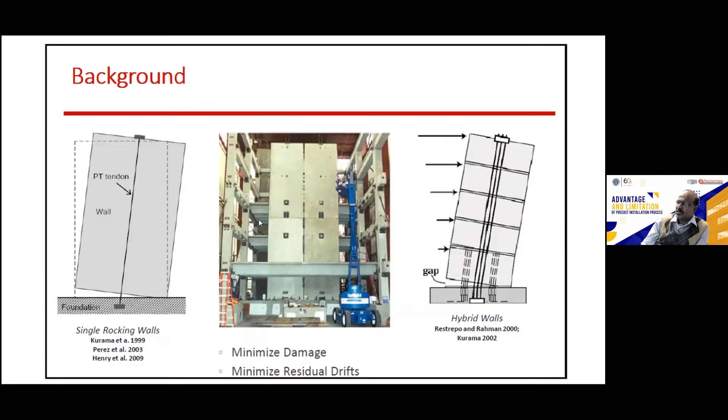And by doing analysis, by doing the proper evaluation, we confirm that the PreWEC is going to be far superior to any of these wall systems that have been studied. So for the remainder of the presentation, I'm going to focus on two systems.

One is the single rocking wall, and the second is the PreWEC system. The reason we studied the single rocking wall is to understand the dynamic characteristic of a single rocking wall and quantify the amount of damping that one can attribute to a rocking behavior associated with this wall. We were aware of the fact that if I quantify the damping to be about, let's say, 5% equivalent due to rocking, that 5% will not be expected in the PreWEC system. The moment you introduce hysteretic damping, the velocity of the structure is going to be changed during rocking, and therefore the amount of damping that you can experience will be different as well.

But we wanted to quantify the amount of damping coming from this system, amount of damping coming from this system, compare and contrast, and figure out what would be the advantage. We were aware that if you have a moderate seismic zone, maybe the single rocking wall would be cheaper and easier and would provide adequate performance. That was our mindset when we got into this particular quantification.

So when we do a PreWEC system, I do have videos, and I will share with you at the end of the first part of the presentation. So when you look at a PreWEC system, this particular test was completed at Auckland. Basically, what you will see is that the amount of damage to the wall will be pretty limited. All of the deformation will take place here in the O connector, you can see here, and they are the ones that dissipate energy.

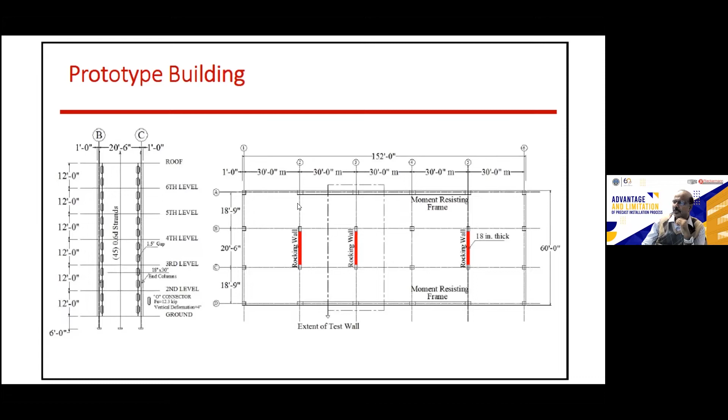From that particular prototype wall, which gave us the dimension, the amount of post-tensioning, and the seismic mass associated with that structure, we came up with a very simple structure here - a full scale with mass lumped at 6 locations at the floor level, from which we then reduced it to an equivalent system, which is a concentrated mass at one location. From here, we then scaled down to a 1 to 3.6 scale ratio, about the 3rd scale, to come up with a structural system that we can put on the shake table.

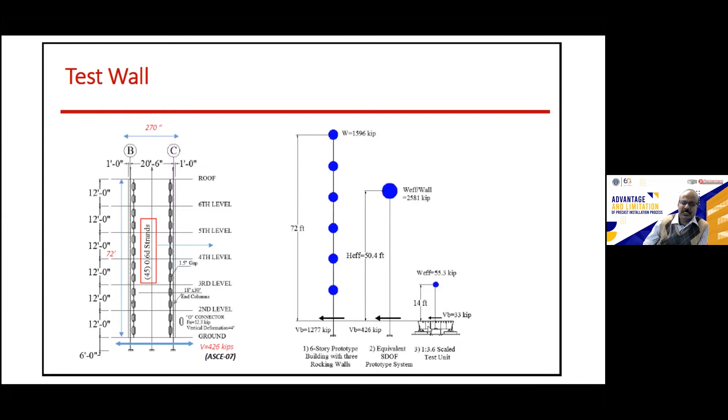In all cases, we ran through a series of tests and made sure that our system, the newly designed wedges, will sustain large inelastic strain. So we would pull on it, and we defined two things. The first one is fracture strength—when the first wire breaks, we call it the fracture strength.

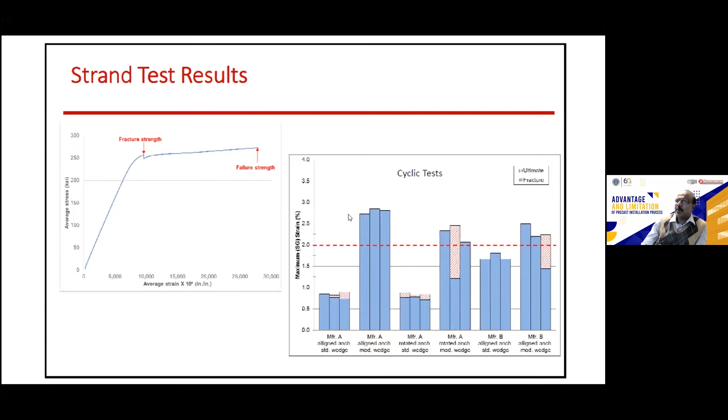Then for the first part I'm going to cover, the single rocking wall. We designed four different wall systems, each with different amounts of pre-stressing. We varied the initial pre-stressing, the seismic height, the seismic shear resistance, and we also looked at the confinement issue at the base of the wall.

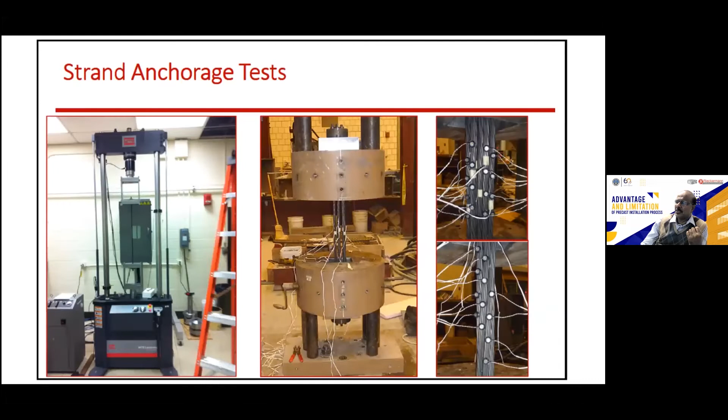The reason we looked at that is, at the base of the wall, because it rocks, you could potentially crush the cover concrete, which isn't a big issue since you can always fix it. But what we discovered was that it can potentially penetrate into the core concrete as well. So we wanted to see how to overcome this particular challenge.

In past tests, we used a steel channel at the base of the wall so that there wouldn't be any crushing and spalling. That solved the problem in terms of dealing with the crushing and spalling of concrete in the toe region.

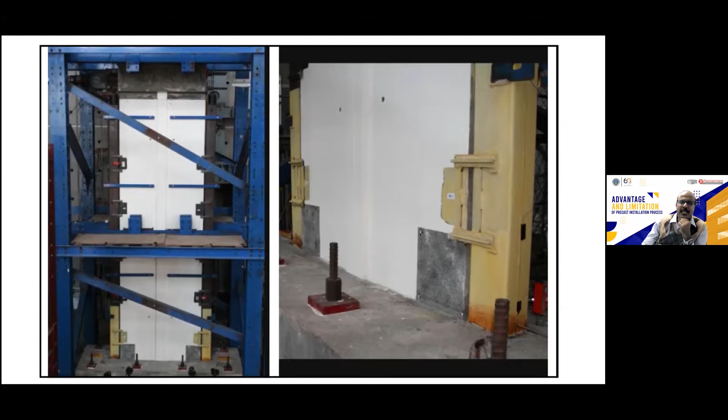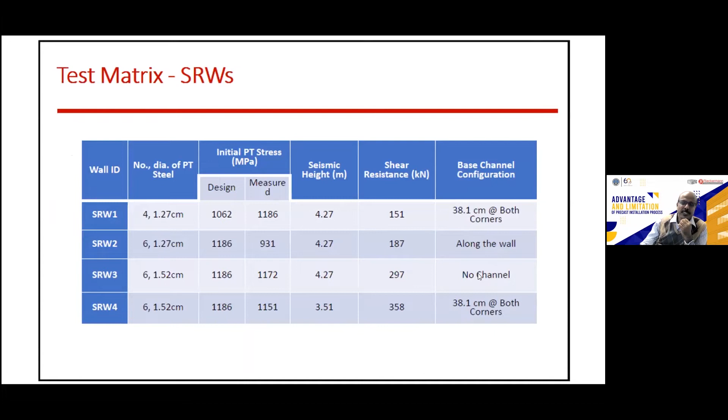However, the precasters we work with were not happy that we were using steel channels because of the added cost, and they questioned whether, if it's limited damage, they'd rather fix it after an earthquake than install steel channels up front. So we made that one of the variables—in some cases we included a channel, in others we did not, to address their concern.

What's interesting with these structural walls designed to rock is that, if you've done seismic design with cast-in-place walls, you'd have confined regions at the ends of the wall where forces concentrate. But in between, typical design dictates only a minimum amount of reinforcement to control shrinkage cracks. So the amount of steel we ended up using in the walls was very limited.

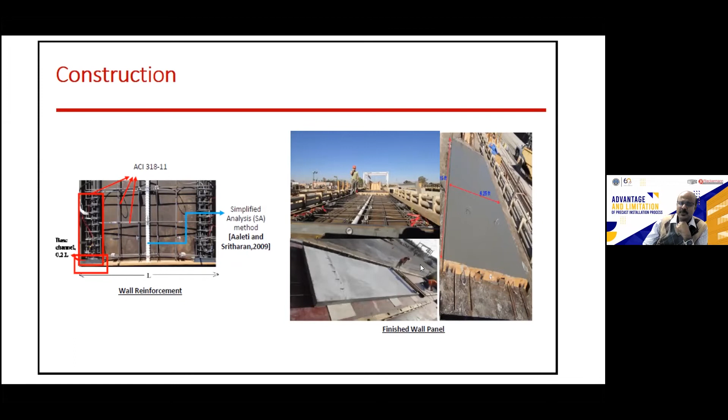Here's another shot showing the construction of the wall panel—you can again see how lightly reinforced the walls are, except at the ends where we provided confinement reinforcement. The wall panels were cast at a precast plant and then transferred to the test site.

The test was done at the University of Nevada, Reno NEES testing facility, if you're familiar with it. We put the structure on the shake table, supported by the foundation, which was used so we could anchor the post-tensioning in the middle. There's a pocket here—hopefully you can see the mouse—and inside is where the post-tensioning anchorage was placed. The wall foundation was secured rigidly to the shake table so it experienced the same excitation.

Remember I talked about the effective height and effective mass for the shake table test—those were calculated. What you're seeing here is that the actual mass was placed outside the shake table, and it was transferred using a rigid link beam to the wall at the right location, so that the seismic inertia effects were transferred to the rocking wall, allowing it to experience the earthquake effects.

For shake table tests, for each of the tests, we used in the order of about 15 to 18 different seismic motions. We used 2 suites of motions.

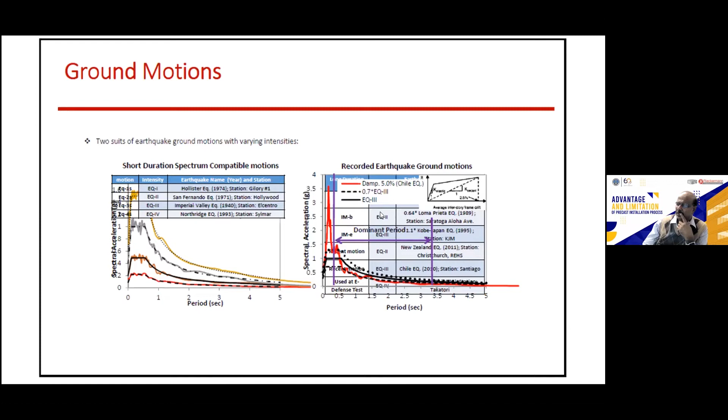We also took some recorded earthquake motions, so those came from New Zealand, Chile, US, and Japan, and a number of other countries, and then we modified them slightly, but made sure it was the actual motion with an amplification or de-amplification. The reason we did that was that the spectrum compatible motion provides some useful information, whereas the recorded ground motion provides some other useful information. So we kind of mixed and matched.

What I wanted to do is show you some shake table tests, so you get a feel for how they perform in the actual test. But before I do that, let me show you some damage up front, and then I'll go to the video file so you can see it.

If you look at the test observations, EQ3 is the design level earthquake - basically an earthquake that's equivalent to a design spectrum that you have used to design the wall. And almost in all cases, as you can see here, there wasn't much damage that occurred to the wall panel. So the walls rocked on the foundations and then came back to their original position.

When you look at the maximum considered earthquake, you can see there was some damage, and it's often confined to the cover concrete and required some superficial repair. But I must say that in some cases, there was some penetration of the damage to the core concrete as well.

Even though in this particular case we did use a base channel, and in this case the wall panel did not use a base channel. I just wanted to give you a feel for how they appeared with and without the base channel, and the extent of damage you would experience in a maximum considered earthquake.

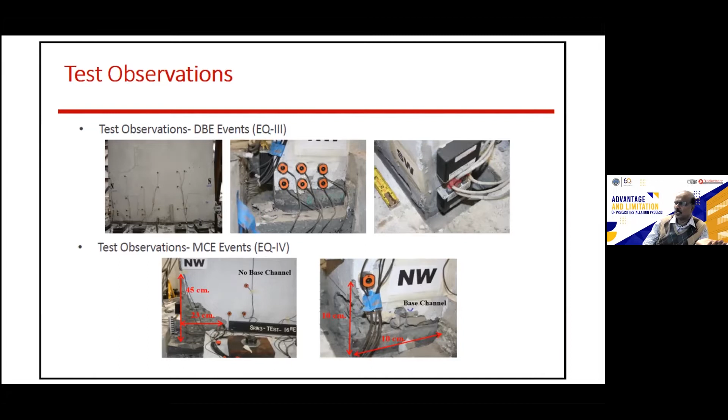So the maximum considered earthquake would come from a magnitude 7, magnitude 8 type event. It happens once in the lifetime of the structure is what you're expecting, but nonetheless, that's what you're expecting the structure to do.

And as I mentioned, we did vary a number of things during the design - these are different wall panels with different strength and different amounts of post-tensioning. And because you don't have any energy dissipation into the system, you could say that most of this behavior was nonlinear elastic characterization, which is what you see here.

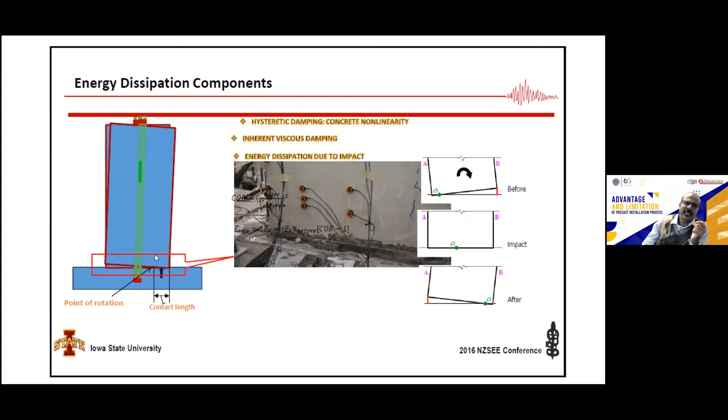When you have a single rocking wall, the energy dissipation is primarily coming in different forms. The primary component is basically due to impact. There's inherent viscous damping one could expect, but since there are no non-structural elements or any large structural system surrounding the wall, that inherent viscous damping is going to be small. We did observe some nonlinear hysteretic damping creeping in due to concrete experiencing nonlinearity, and as you can imagine, that happens in the toe regions of the walls. It's very small, and that component was also expected to be small.

What we wanted to do is quantify some of this damping so that we can estimate the amount of damping these walls would experience.

There are a number of sensors used on the wall structure. They help us quantify the amount of damping these systems are experiencing.

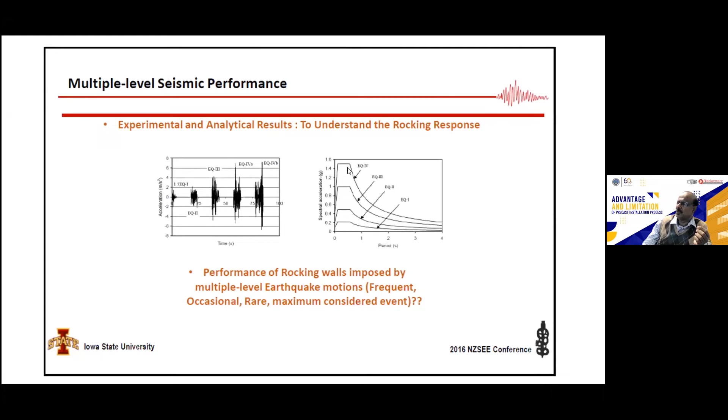For example, if I were to look at the different levels of earthquakes—these are the spectra I'm showing for EQ1 all the way to EQ4—we established, based on a number of criteria, which I can go into detail on if you're interested, at a given earthquake level, how much drift we're going to allow.

How much acceleration are we going to permit, and what would be a tolerable residual drift we would accept when a structural wall is subjected to these different levels of earthquake intensity motions. In other words, if we subject the wall to EQ3, and the maximum drift is below 2%, if the maximum acceleration the wall experiences is below 1.2 G at full scale, and if the wall comes back to less than 0.5% residual drift, we would claim that wall has performed satisfactorily.

If it violates any of these, then we will quantify that to be unsatisfactory, at least in that particular category.

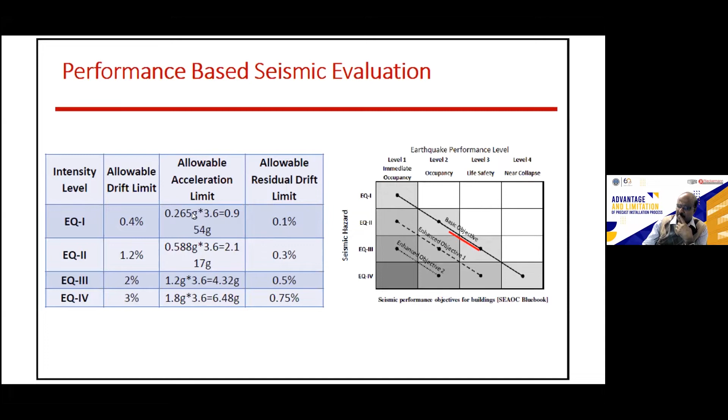The concept for this was developed using what originally started from the SEAOC Blue Book as the performance objective for different seismic hazard and acceptable performance for different levels of occupancy. That's how we developed the criteria. I don't want to go into the details as to how that came about. Some of these numbers were given by SEAOC, so we used that as guidance, and we did include some of our own analyses to help us establish these performance criteria, which were established upfront before we did the test.

So let me just recap. I ran a series of single rocking walls. They had a limited amount of damping, on the order of 5 to 7%, which one would argue is a very small amount. If you go to a designer working in a seismic region, I think some of you are probably in that category, and if I ask you, can you actually run with 7% damping in a structural wall, I think most people will say no.

So how was that possible? Especially given that the general belief is that you need more damping in the system. One of the things we proved in this study, and some of the other subsequent studies, is that the amount of damping you need in the system is not as important or significant as people once believed. So you don't necessarily have to have 25% damping. Maybe you need 10% or 12% damping. But what this study tells you is that you don't need an excessive amount of damping for the structures to survive.

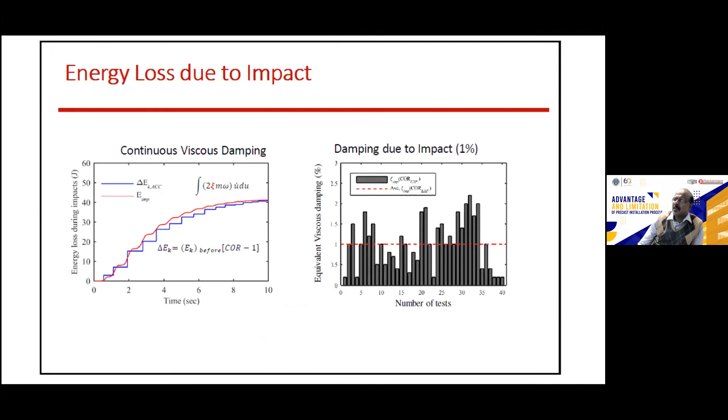So one of the messages I want to leave with you based on this presentation is that one of the most important components for seismic design is the ability to design the wall to experience a nonlinear response. By doing the nonlinear response, as you can see here, I'm limiting the amount of force that goes into the system. So that component, the fact that the wall can experience elastic nonlinearity, is more important than the amount of damping.

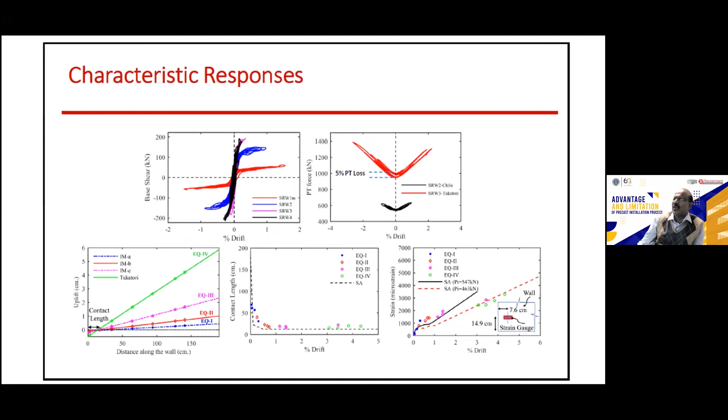If I were to rephrase that, in the old days people said don't design them to behave elastically, because that's not good, since they will attract more seismic force. I completely agree with that. But that doesn't mean you have to design it as a nonlinearly responding structure plus throw in 20-30% damping. Instead, what I'd argue is that all you need is a structure with the ability to control the maximum force that goes into it, or the maximum force that's going to be attracted, so that you can control the design. And you need some damping in the range of 10-15%, not 20 or 30%. That's something useful to keep in mind.

One of the lessons that we got from going through this particular structural system.

Even though we did not expect these walls to survive the actual earthquake, since they performed better, we developed a design approach for how you should design these walls. They could easily be designed for moderate seismic regions, for example. We recommended the amount of damping to use in design and established a design procedure so that it's a cheaper way to design rocking seismic walls without adding a lot of supplemental damping if you don't have to.

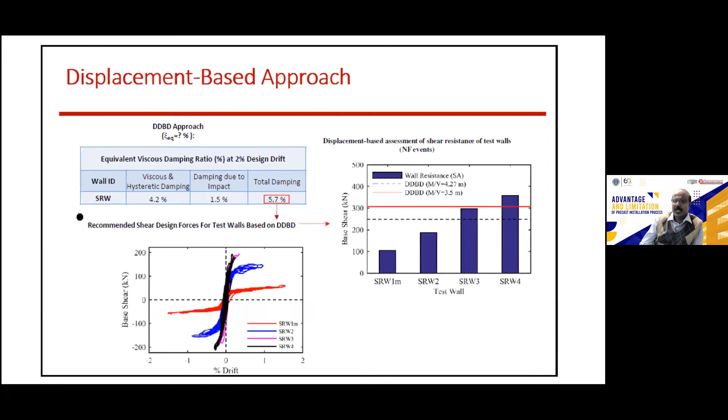So with that, I'm going to show you some videos, and then let you think about some questions. I'll stop at the end of the video so you can ask me questions before I go to the next part of the presentation.

Okay, I'm going to pull one figure.

So here's a test unit. Again, I want to acknowledge the number of people who participated in this project: Professor French from Minnesota, Professor Eric Musselman, now at Villanova University, and precast companies and material suppliers. This project was funded by the National Science Foundation through the NEES program.

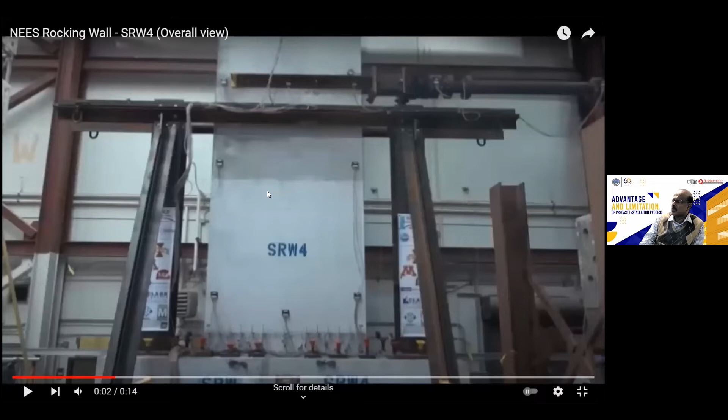I paused this video to explain a bit more. You have the rocking wall with no energy dissipation except the post-tensioning coming through the middle, connected to the foundation. The foundation is tied to the shake table. Here's the link beam, and the seismic mass is sitting on the right side of this link beam, and the wall is going to be rocking. The 70% Takatori motion is a fairly large intensity motion, but you'll find that the wall behavior is fairly easygoing compared to what you would expect. Okay, I'll play that one more time.

Okay, the next video, what I wanted to show you is the wall toe of the same structure.

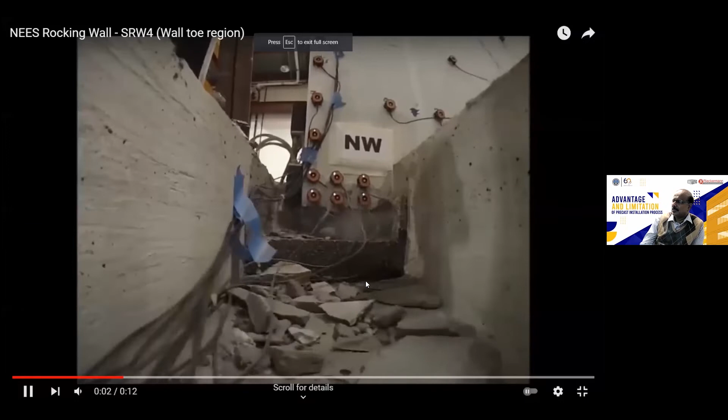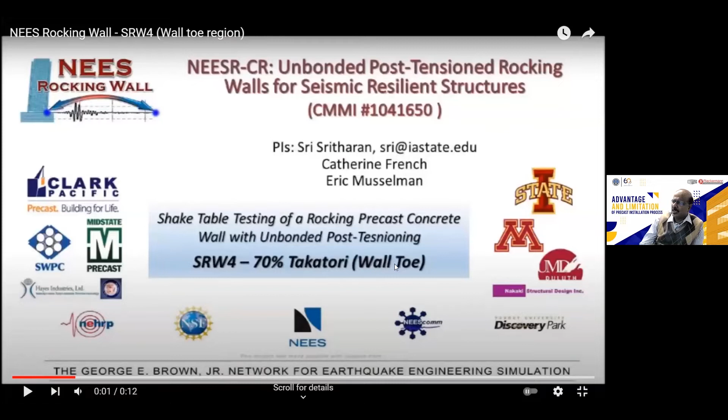So it's the same wall, but I want you to see how aggressively it's rocking at the toe. Obviously the base of the wall experienced a lot more, but you could also look at the amount of damage the wall is experiencing at the base. Again, it's not significant. It's the same wall panel, same motion, except you're looking at the wall toe.

You could see that some of the cover concrete came off in this particular motion. These were LED sensors we were actually monitoring, and we were able to quantify the rocking velocity as it approaches the wall foundation and then leaves. That allowed us to calculate the amount of damping dissipated, because it approaches with a certain velocity and bounces off with a different velocity, and we were able to quantify the amount of energy dissipation in that motion.

So let me just do one more, and then I'll take up questions if you have any.

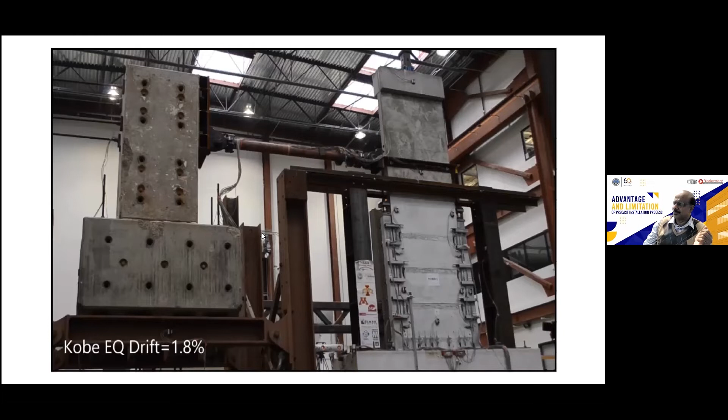Now, again, I think Jimmy asked a question earlier. You have the wall panel, the seismic mass, sitting on a pin jointed support, as you can see here. So if you take the wall, basically they don't have much resistance because this is on a steel frame, which is all connected using pin connections. And then that's where the rigid link is established. At the end of it, we have the load cell so that the inertia force can be captured as a function of time during an earthquake motion as well.

So that's what you see here. And what we did was design 4 PreWEC systems and go through the same exercise. We modified the amount of post-tensioning. We modified the toe region in terms of minimizing damage. We modified the seismic mass. We modified the seismic resistance of each wall, and then went through a series of tests to see what would happen to these walls compared to the SRWs, which are single rocking walls.

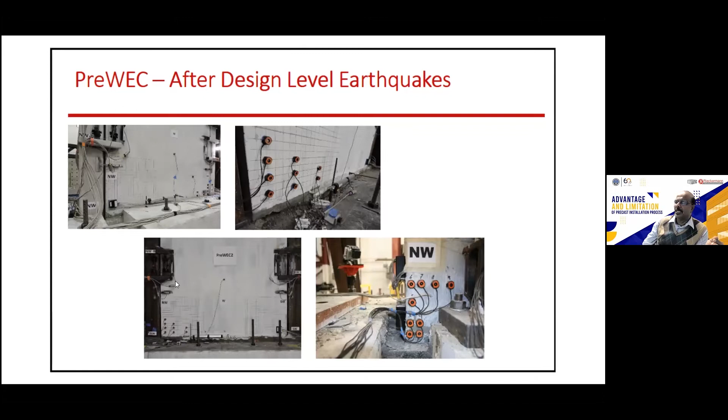For the most part, what we observed is that the PreWEC systems perform better than single rocking walls. After a design level earthquake, you could see they don't have any damage at the wall toes or anywhere. They also met most of the performance criteria that we established. In this particular case, we are comparing the PreWEC here with the SRW, which I've already shown you, and we compared, and I already said they exceeded some of the limits, especially the lateral load limit.

But if you look at the PreWEC systems, we passed almost all of the criteria without any problem. So I don't want to misinform you - the damping does play a role. Damping does help, but it does not contribute to the extent people thought it should help in the past.

So keep that in mind - the performance of PreWEC is definitely better than the SRW, but in some cases you may find that SRW may be adequate. But if you want to improve the performance, you can certainly introduce a PreWEC system. And when you introduce a PreWEC system, you can dictate the amount of damping you're going to put into the system by deciding on the design of the connector and the quantity of connectors that go into the PreWEC system.

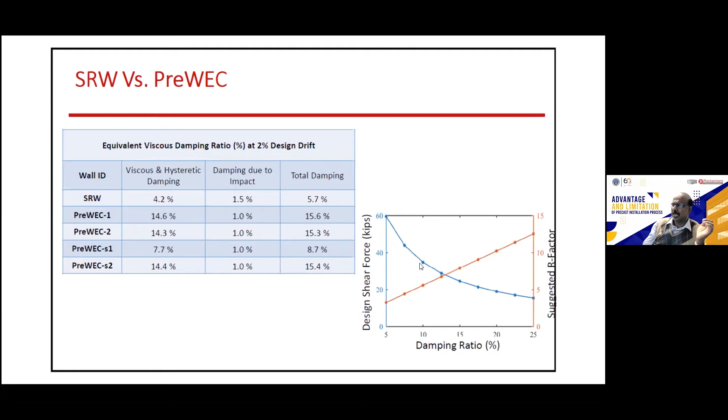We have also quantified the rate of input energy. This is an interesting thing, I'll briefly touch on this. We were a little surprised with the way single rocking wall behaved better than we expected. Again, this is to do with the fact that single rocking wall had less amount of damping.

What we discovered in the process is that if you take a look at the single rocking wall versus PreWEC, because of the angular velocity being different, or in other words the speed at which the walls rock, we found that when the wall rocks at a higher speed, the rate of input energy doesn't go into the wall as much as it would in a PreWEC system or a cast in place wall. So the amount of energy going into the wall is somewhat less than you would expect for another system with a lower angular velocity. And that also contributes to the wall's performance being better.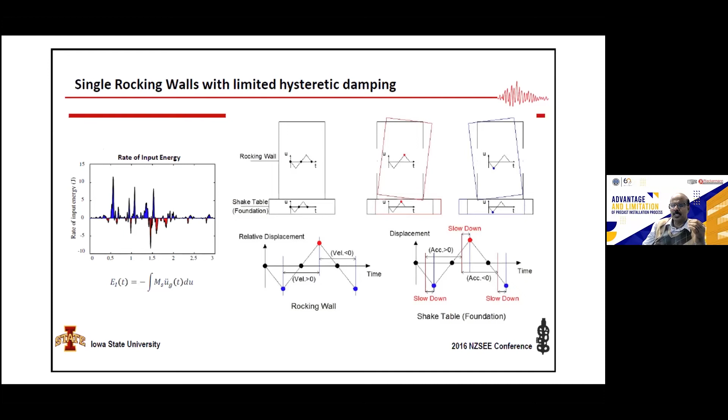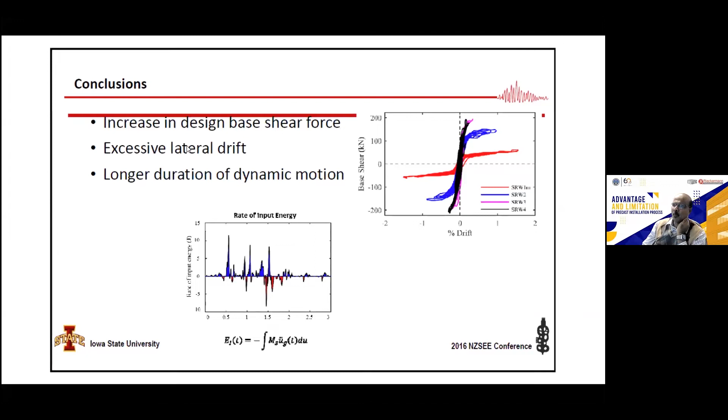This is just for us to figure out why the performance turned out better than people normally anticipated. We were also struggling to understand why 5% damping alone may be sufficient, and it turned out the amount of energy going into the wall is also on the lower end than what would be the case for the PreWEC or even cast-in-place wall system. So that's the exercise we did to figure out why the drift level was not always as excessive as we expected.

So let me just go back to the PreWEC system. We had, again, the same scale, 4 walls. These are the wall dimensions, unfortunately in feet and inches, so that's about 2 meters in terms of wall length. The height is about 5 meters, and wall thickness is about 125 millimeters. Because this is at 1 to 3.6 scale, you could see we used 0.6-inch strand.

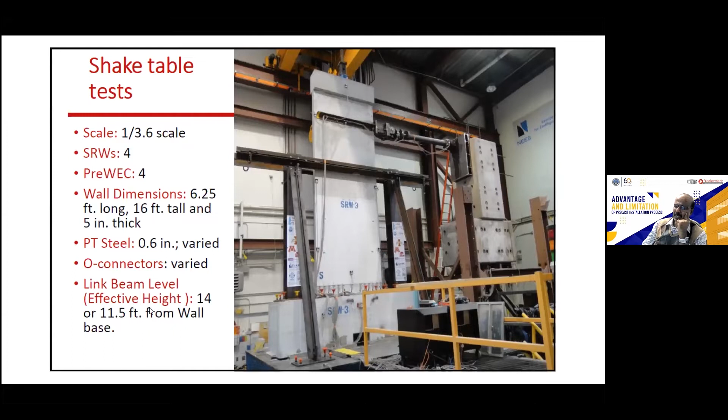The amount of post tensioning was varied. The connectors were varied, and the link beam was positioned at 2 locations to change the effective height from 14 to 11.5 feet.

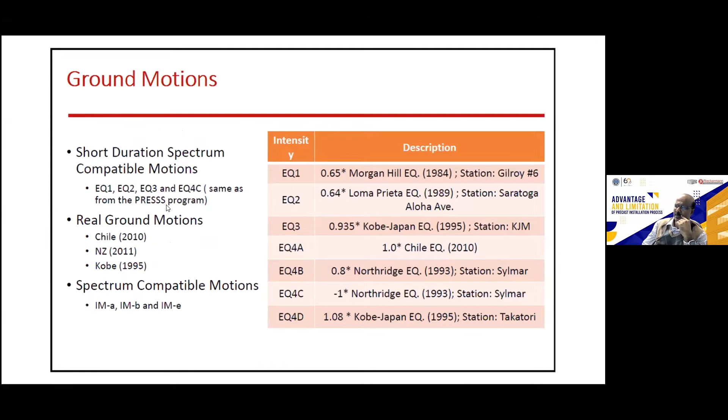Again, the ground motions were very similar to what we have done before. We combined recorded earthquake motion, so you could see a number of events coming from spectrum compatible and then the real earthquake motions.

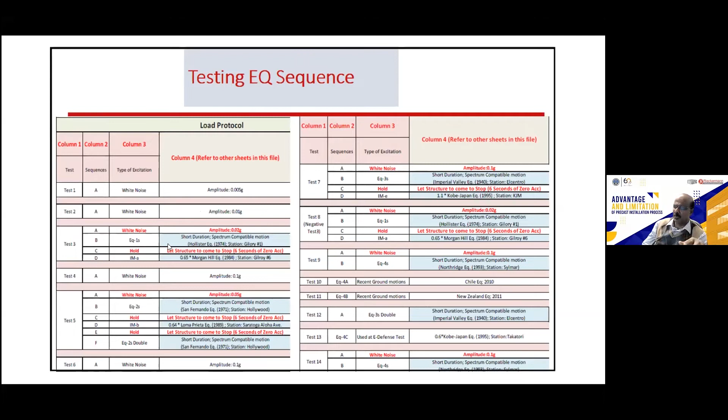These are typical sequences. In this particular case, the wall was tested for 14 different earthquakes. In some cases we ran white noise and then an earthquake, or sometimes we repeated the ground motion, or repeated it with a negative sign to collect additional data. At minimum we recorded 14 different earthquake cycles, and continued the test for the maximum considered. In this case we went all the way to 21 tests before calling the test complete. So these walls were tested very adequately.

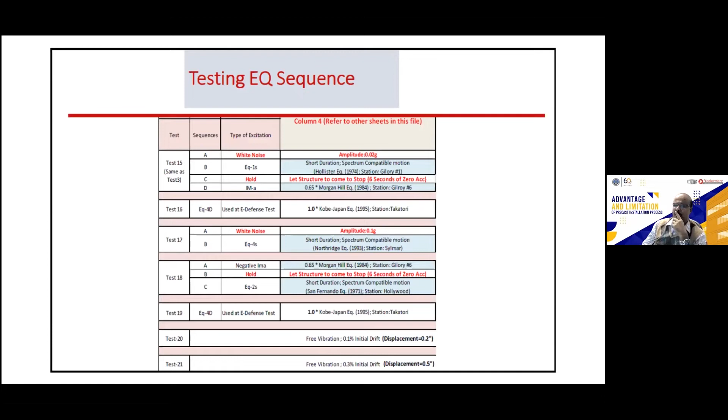So, 20 plus earthquake motions. We tested 8 walls, 4 single rocking, 4 PreWEC. One thing I would point out is that in none of the walls did we fracture the strand at the anchorage. Remember, we designed the anchorage to be different, and it performed extremely well, and we did not have any problem with anchorage failure. So with that, I'm going to stop here.

Let's see if I have the video uploaded here for the PreWEC system. I don't believe so. I'll pull some video, but if you have any questions, go ahead, feel free to ask. I'll see if I can pull a couple of videos to show. In the meanwhile, is there any questions that you have? Again, the best way is to please unmute yourself and show your handsome and beautiful faces, and you can ask the questions directly to Dr. Sritharan. Any questions? You, Dr. Anthony, do you have a question? Not yet. You can ask the question in Bahasa and I will translate. Dr. Hartanto can also translate. Feel free to ask. Dr. Sritharan may also understand some Indonesian.

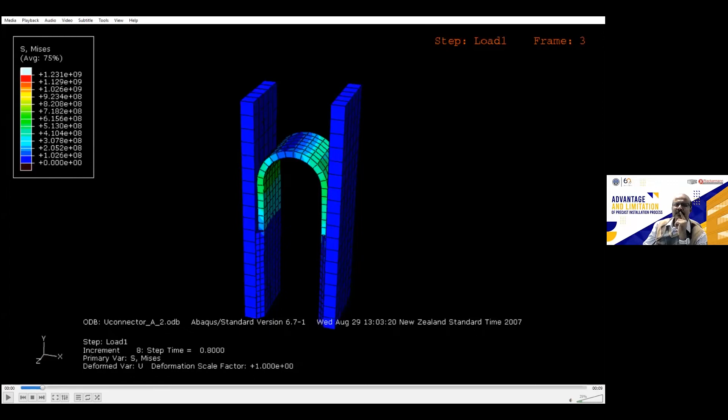Okay, so hopefully you can see my screen now. So in the jointed wall system, this is the connector we use. So it's a bent steel plate.

So this is an analysis so you could see easily. So when the wall rocks, basically you're deforming the U plate. Now, because this goes through a large radius, you cannot use regular steel. We ended up using stainless steel, so that increases the cost. And when you use stainless steel, the welding of the connector is also more difficult - not many people can do stainless steel to regular steel welding. So those are the difficult tasks.

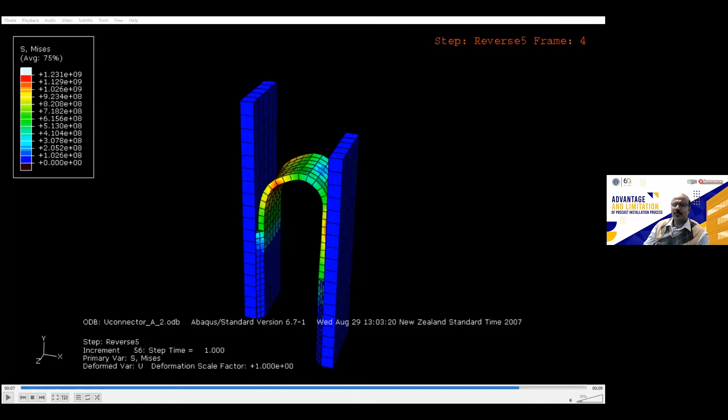And plus you had to take this out and put new steel between the wall panels, and that's why we eliminated it. So with the PreWEC, let me see if I can get out of this. I don't know why it's not letting me do that.

Okay, so here's a close-up of a PreWEC test that we did. This is basically showing you the wall panel. This test was done at NCREE, one of our first tests. In this case, we used a steel tube, and you can see the connectors are placed right here, all the way along the length.

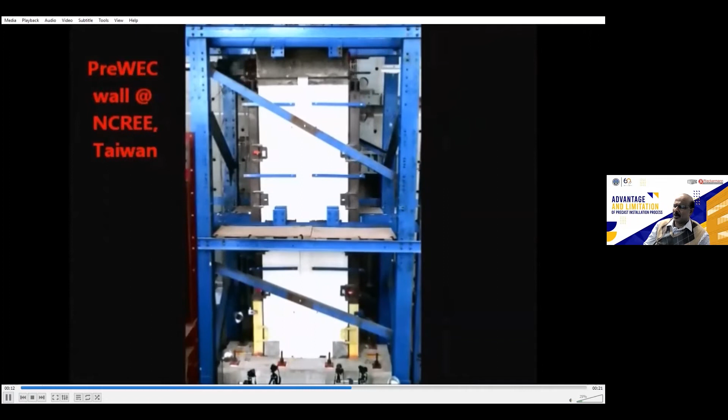You can see when the wall rocks, this was done in a quasi-static manner. So basically the end column goes, and if you focus at the base, you can see how the wall lifts up and down. I'll show you a bit more close up as well. You can still see it in this video, right, Hart?

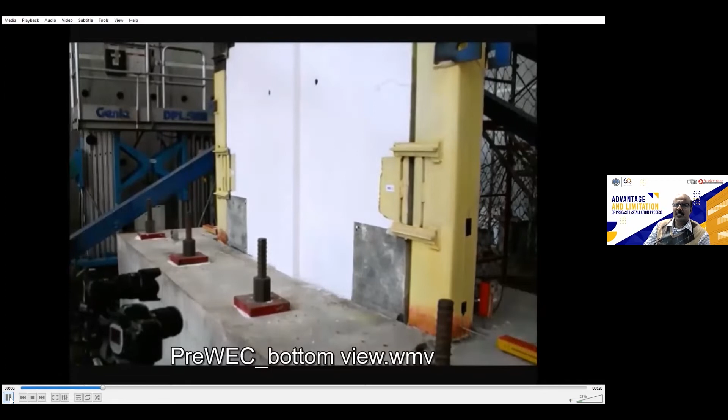Yes. Okay, so here's a close up of the connector. You can see how it deforms, and the extent of damage is almost nothing compared to what you would expect for a cast in place wall. So that plastic or flexural yielding is what's basically helping you dissipate the energy.

Okay, is there any question? There are two questions in the chat box. Yeah, go ahead and ask.

The first question was whether you were using flat or round duct, metal or PE, PP duct. I answered that already, saying the selection of the duct does not really matter for this, but it's more dictated by the thickness of the wall. We typically use round duct, but you could easily use a flat duct. I think we may have used it in one or two projects. If it becomes an issue, you can certainly adjust that if you like.

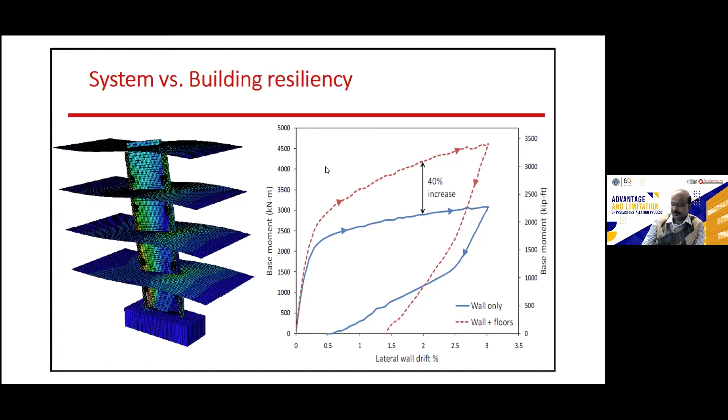Now, the reason we specifically looked at this issue is that when the wall can self-center, if I integrate that with a rigidly connected floor system like this, the wall plus floor will not recenter. The moment you connect the rocking wall, or any self-centering wall, to the floors and allow the system to experience inelastic action together, you will find that damage is going to happen. Some damage will take place in the floor, and combined you're going to get more resistance and more permanent deformation. So a simple message here is that even if the self-centering wall can recenter, a self-centering wall connected to a rigid floor will not recenter. We wanted to address this issue and figure out how to tackle this in real building structures.

So this is the point I was making. I think you've seen the video of this wall where I showed you the close-up of the U connector.

When we did the test, we actually took a reinforced concrete wall and looked at its performance. These are equivalent in terms of their performance. This is the reinforced concrete wall, so you can see the extent of damage you would experience—both walls have gone through 3% drift. This is caused by plastic hinge formation, flexural crack turning into flexure-shear crack, typical damage you'd experience. This is our PreWEC system. So there's a night and day difference between how the walls perform.

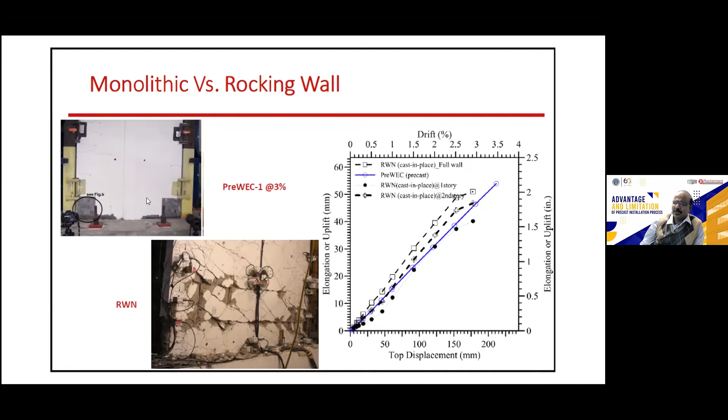At the first floor level, if I quantify the growth or uplift coming from the wall uplifting, you get a displacement there, so the floor has to go through that motion. Here, the wall panel doesn't uplift, but you have cracks opening up that basically accumulate, elongating, in essence elevating the floor here as well. This blue line is what I would expect if it's a PreWEC system as shown here. In this case, we found the uplift was actually slightly higher because the cracks typically don't fully close, and therefore the growth in the crack contributes to increased uplift. So again, this is not a precast or rocking wall problem—it's a problem with any structure when you don't account for the floor interaction.

To address this issue, remember we designed a prototype wall, a 6-story prototype structure, from which I isolated one rocking wall. This test was done at the University of Minnesota in collaboration with Dr. Kathy French. This is what we decided to do: build a cast-in-place floor similar to what you would experience. Obviously you should expect 5 more floors to come in, which would be more expensive. What we did was take the resistance coming from the 5 floors and model that using these rigidly connected beams, as you can see here, because we wanted to see one floor panel, one floor, so we could observe the damage. The rest we just modeled using a rigid or steel beam, to make sure the simulations were adequate.

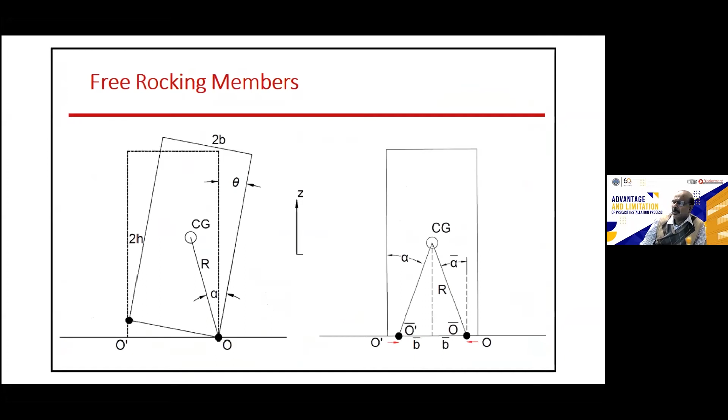So that's one of the tests that we did. I'll go through the video for that test. And then the second set, we decided that we would introduce a completely different concept.

Let me go to that before the details here. The second concept we looked at was taking the same PreWEC wall, but completely isolating that wall using some special connectors. In this first case, we rigidly connected it. In the second case, we wanted to allow the wall to rock without lifting the floor, completely isolating the interaction. So we wanted to look at two different extremes.

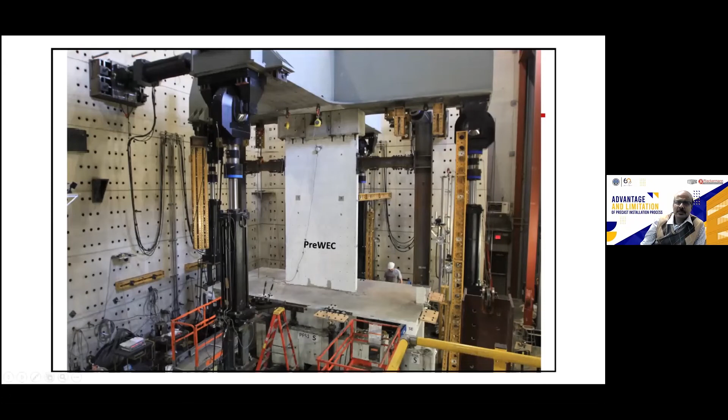Let me show you a couple of videos highlighting these tests. These are pretty interesting tests. Okay, I'll show you a couple of videos for the first one. Let me share the screen.

So this is the PreWEC system overall view. Here's the PreWEC system, here's the floor, and you can see the floor is kind of moving or deforming. I'll show you a more close-up view.

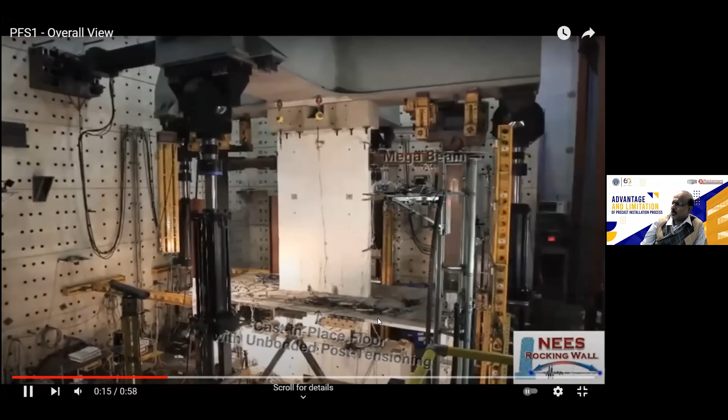Let me pause here. This is the PreWEC system, but you can see there are no columns coming all the way through because I'll show you how we decided to connect the O-connectors in this case in a close-up view. Basically allowing the wall panel to experience in-plane behavior, and we also subjected this to out-of-plane loading because out-of-plane is a realistic load, and we looked at that as well. So this is just showing you how the test was done.

And you could also see, obviously in a building floor, you're going to have connection, so restraint coming from the out-of-plane direction. So these columns were used to provide the out-of-plane restraints. They were not always engaged. We engaged them and disengaged them to see the effects as well.

So the amount of deformation the floor panels are going through is something you would see, and they are participating in the force resistance as well.

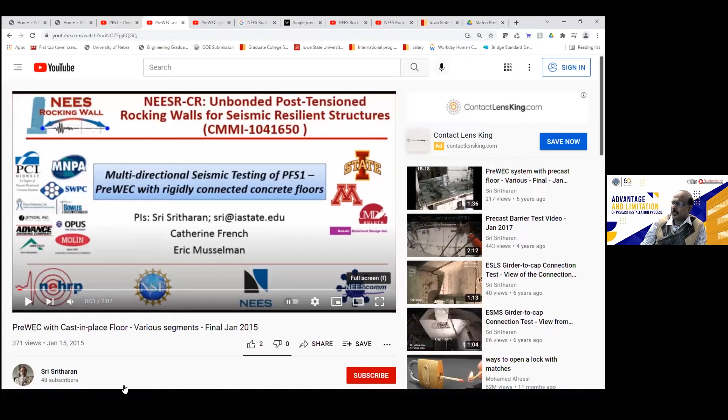Okay, let me show you a close-up of that—rigidly connected floor. Hopefully this will show you a bit more close-up of the view. Here's the PreWEC system, here's the floor panel, and this is the out-of-plane restraint. You'll see that sometimes we engage it, sometimes we don't. These are all sensors, monitoring the entire width of the building.

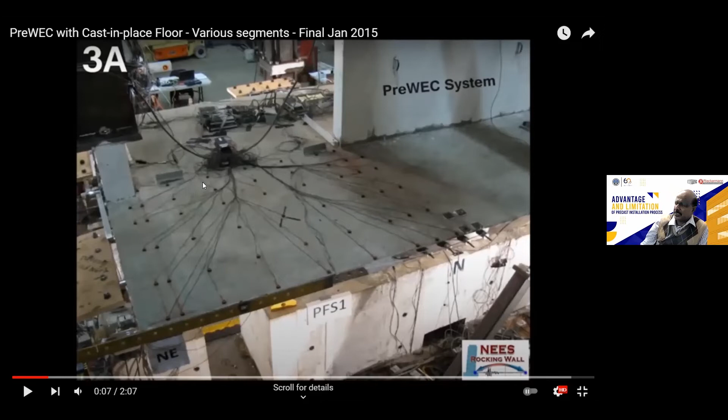I want you to pay attention to how much deformation we experience here. It's also important to realize that they can go through quite a large amount of deformation and maybe experience some damage that you'll see during the test.

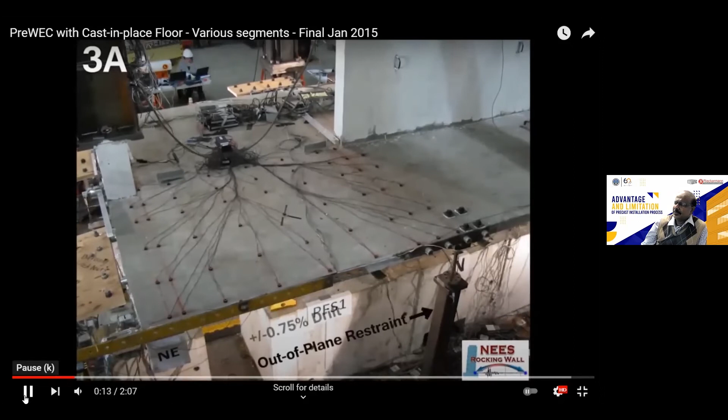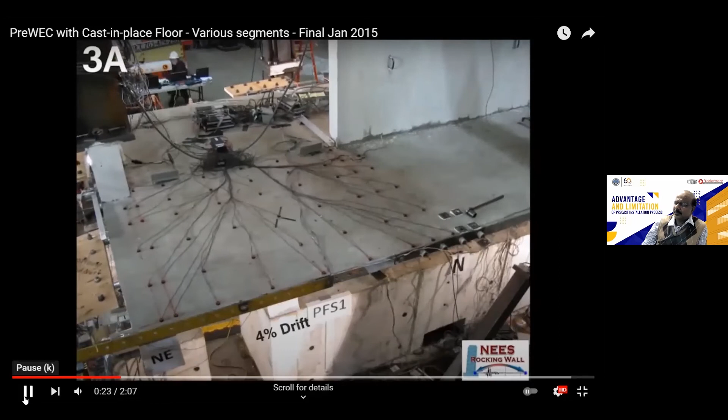So we are now at 3% drift. Now at 4% drift. You can see the wall panel is not damaged. Okay, let me pause here and show you.

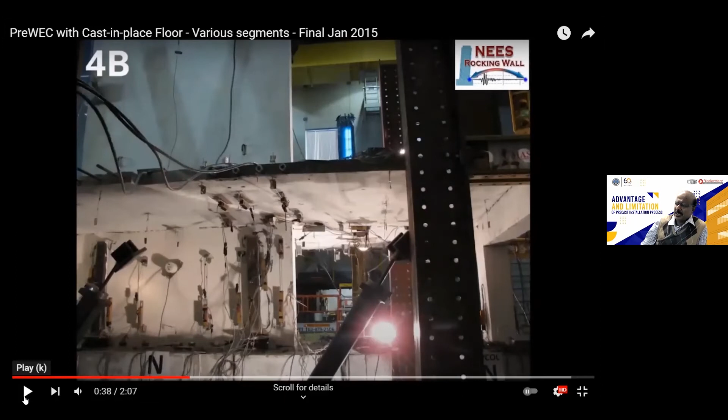In this particular case, we did design a PreWEC system, but we didn't extend the column all the way—we decided to keep the end columns to the base on the first floor only. We also decided that instead of putting the end column at the end, which in this case could introduce some additional restriction, we put it on the side, giving more flexibility to the PreWEC system. The O-connector was placed between the wall panel and the column placed right here, again showing additional flexibility for PreWEC.

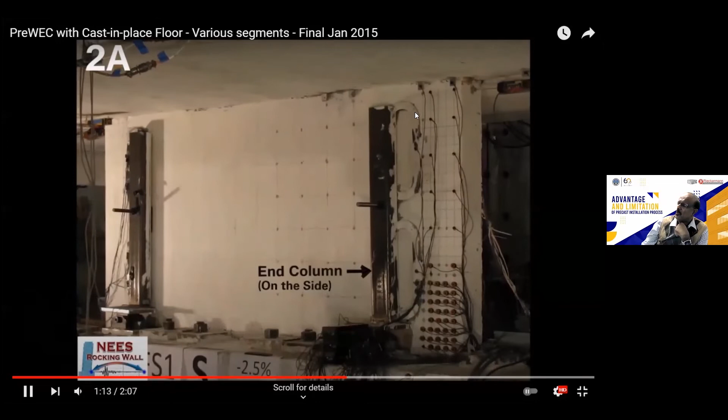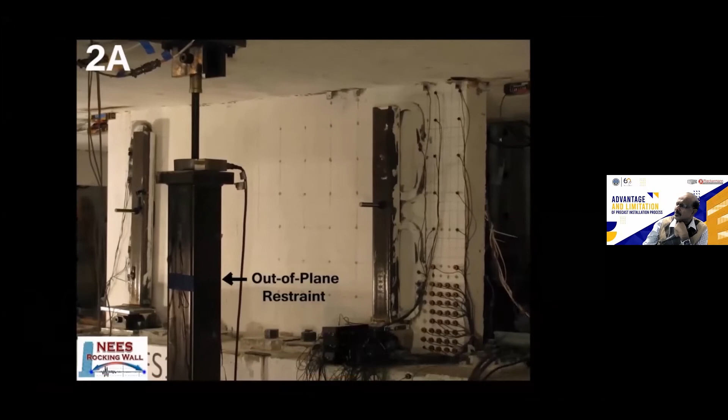You can see the out-of-plane restraint came in here partway through the test. Some damage is now taking place to the wall floor panel, or floor basically. You can see the O-connectors more close up here. But the extent of damage taking place is very minimal compared to what you would see in a cast-in-place wall system.

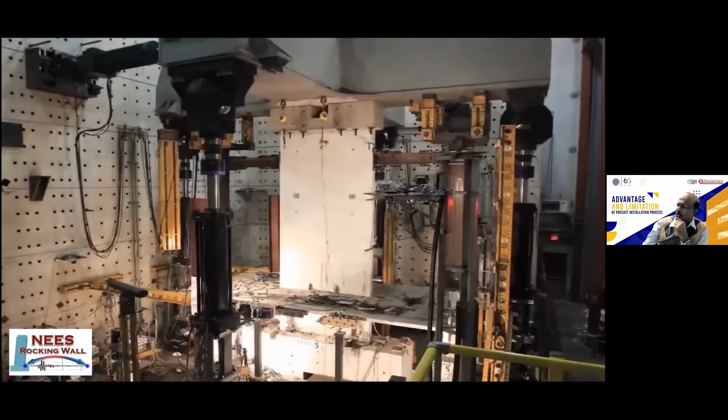So from this particular test, what we concluded was that the floor interaction is something you cannot avoid. You can rigidly connect the floor to the rocking wall as long as you account for the interaction that would take place and make sure that's counted as part of the design—then you would be fine.

So let me show you the second set of tests for the floor panel, and I'll get the video and then explain what we did. Hopefully that comes—I don't know.

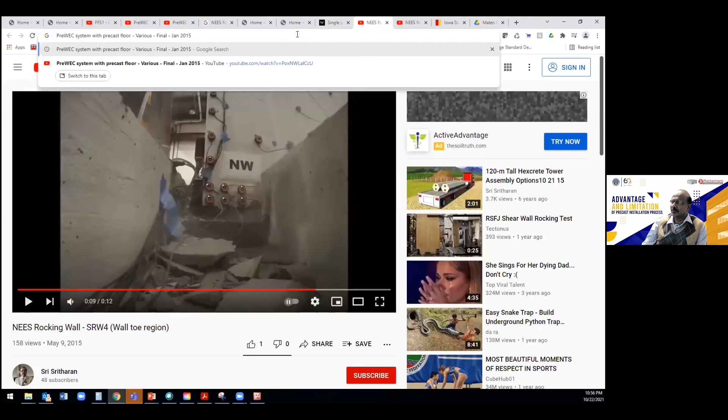Okay, I'll get the video going and then explain to you a little bit more.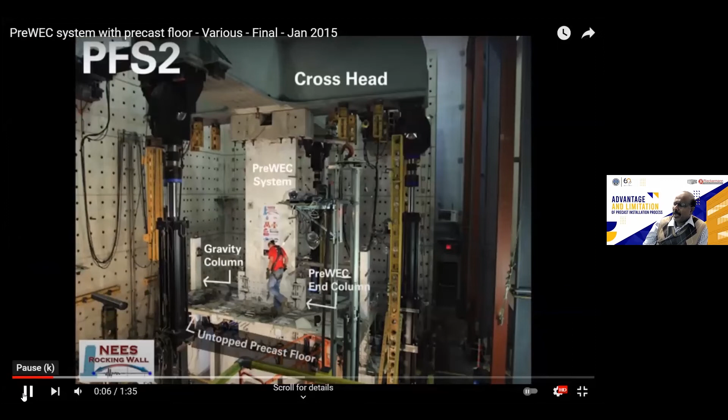So in the second test, this is what we did. We had the rocking wall, and in this case we had an end column, as you can see. These are precast concrete columns that we ended up using. The floor is basically precast floor. We decided to use a precast floor to show that you can actually use a precast floor for seismic design. So that's what got used. And the other thing that we did was we isolated using a special connector connecting the floor to the wall.

So these are untopped, and we did not put any topping. You can see all of the precast floors here, and they were designed to provide the load transfer as much as we used in the previous first case. Here's part of the gravity column, and here's the end column.

So now, having this end column all the way to the top, there's an advantage. You can transfer the gravity load through the end columns, and that's exactly what we did. So the wall doesn't have to take the gravity load if you don't want to transfer the load accordingly. There's a connector put in, what we call a V connector, and you will see a close-up where the V connector allows the wall to uplift with respect to the floor. In other words, the interaction was completely eliminated between the two.

So with that, I'll just start the video and take a look.

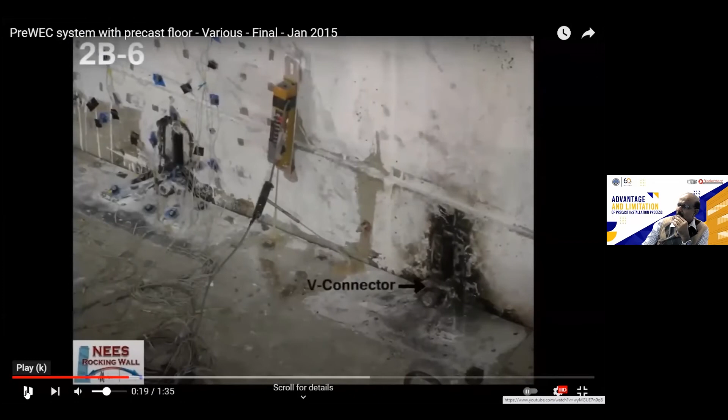Okay, so you can see the V connector. It has two legs, and the stem goes inside this particular slotted hole, anchored with this bolt going inside. They have a super nut at the back end of it, and that's how it's done, and it's welded to the floor. You can see how the floor stays while the wall rocks.

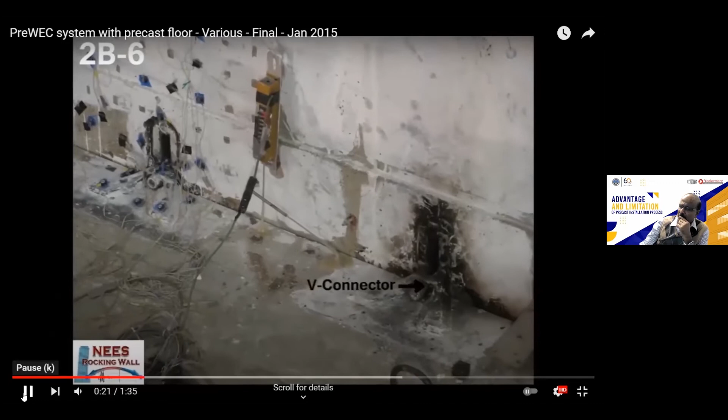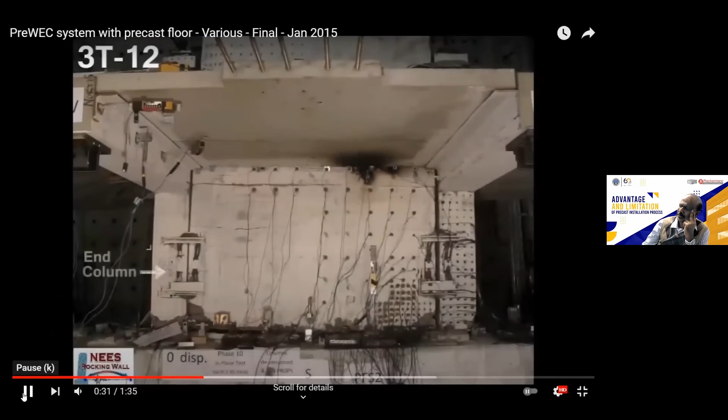So you could see the floor is not moving horizontally. I mean, it's staying horizontal while the wall is rocking with respect to the floor. So you could see that.

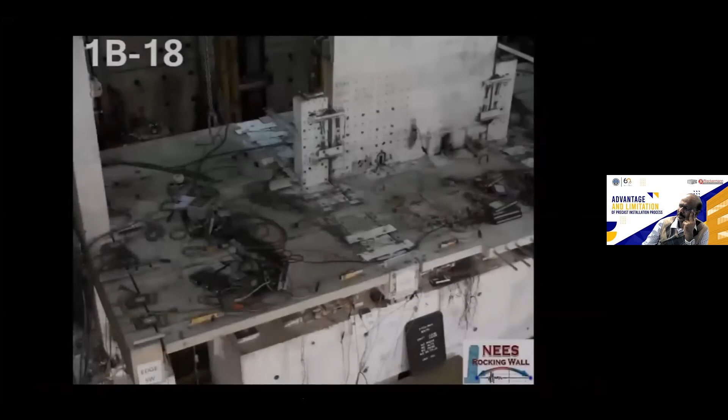So at the end of the test, we found out that this wall system never really failed. So we decided to do some bidirectional testing, and you could see how they all work together.

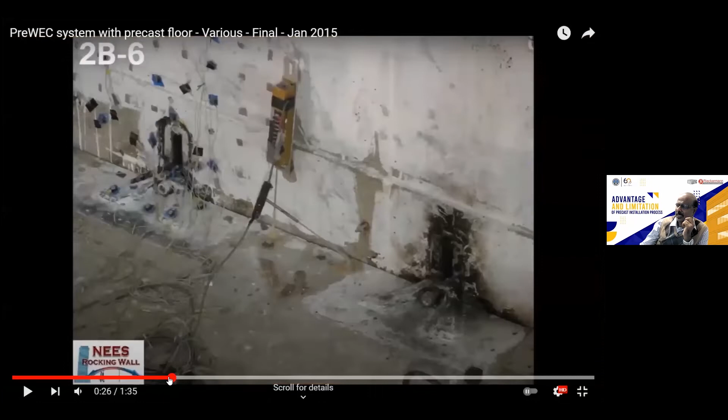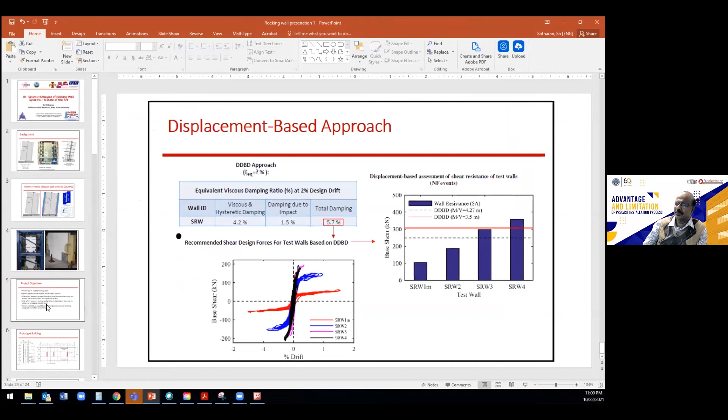Okay, so basically what we did—if I were to go back to the earlier slide, let me just go back and make some concluding remarks, and then I'll ask if you have any further questions. So if I were to go back to one of the first slides that I showed you earlier...

We made sure that the anchorage of the post-tensioning steel can be designed to sustain large strain. Typically a 270 KSI steel would have a strain capacity of about 0.04. We at least made sure that the anchorage can survive until 0.02. That proved to be adequate.

We quantified the seismic performance of both SRWs and PreWEC, and we proved that SRW could be potentially used in seismic regions, even though they have a low amount of damping. And we talked about the fact that it's more important to have elastic nonlinear characteristics so that the amount of force going into the system can be controlled. Damping is important, but maybe not as important as people once believed.

With 6-7% damping, the system will survive. You may end up with a larger drift, but we found that the residual drift is not going to be significant.

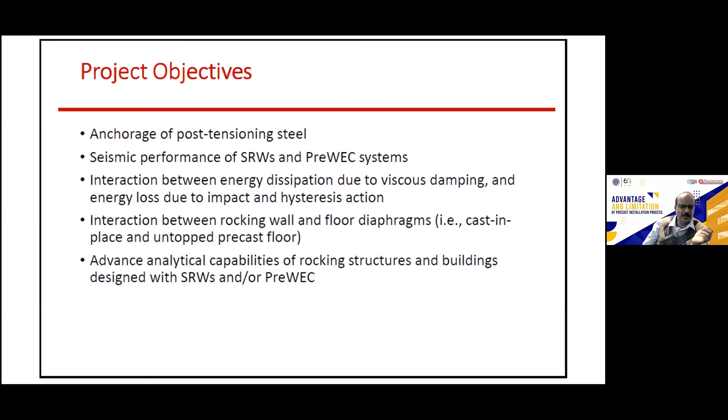Again, if you are interested, some of these papers are available or at least identified on the web page. I'll see if I can. I did find out today that some of the video links are broken. I don't know what caused it, but I will get that information for you. I'll post it here, the project, and it does include most of the publications you can have access to, or if you want the actual paper, I'm happy to share it as well.

Let me see. Okay, I've posted the web page that has most of the information. I think if you go to the publications, you will see most of them, but I'll make sure to update this one as well. There are more than a dozen papers published on various aspects of what we have studied. If you have any further questions, I'll be happy to answer them. With that, I'll end here, Hart.

All right, so this is the last round of questions and answers. Is there any question? Maybe I will start with a question to trigger other questions. So if you're looking at a rocking system, you can either rock at the footing, at a wall-to-footing connection, or you can rock at the footing-to-soil connection, or interface.

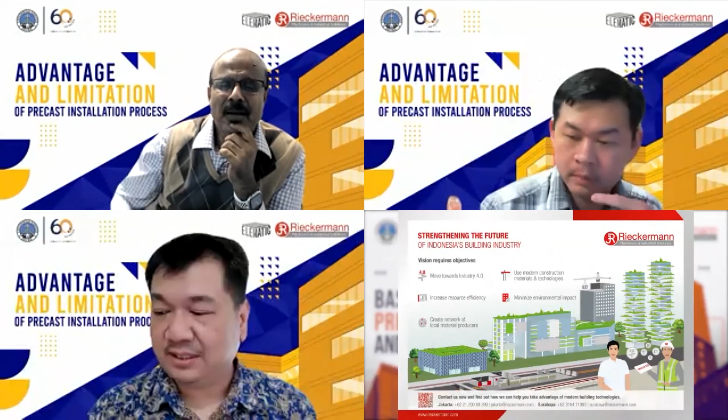One thing that I've considered during our webinar is that the entry point to start a precast system in Indonesia is very hard, right? Because we still need to have the system, we still need to have the design, and after that we'll need the equipment, and that is the barrier to entry. Well, for normal construction, we don't need to have any big investment in the beginning. So I think that is also one of the reasons.

But we already have several state-owned companies who are already making a very good head start. They already have precast factories in several places in Indonesia. I think that should be a good way to start also.